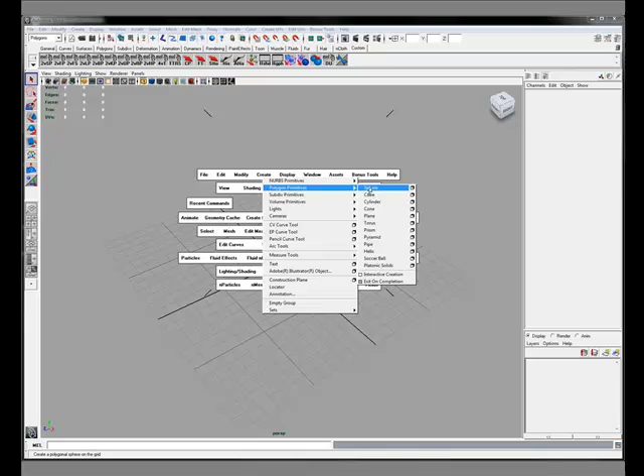Here's a method for creating a cylinder with holes in it. This time I'm going to start with a six-sided polygon.

This version is going to have a smooth surface, so I'm going to redraw some topology here. First, delete all the polygons except for the top. Snap it down to the grid using the X key and the middle mouse button. Rotate it 90 degrees to line up the vertices at the top and bottom.

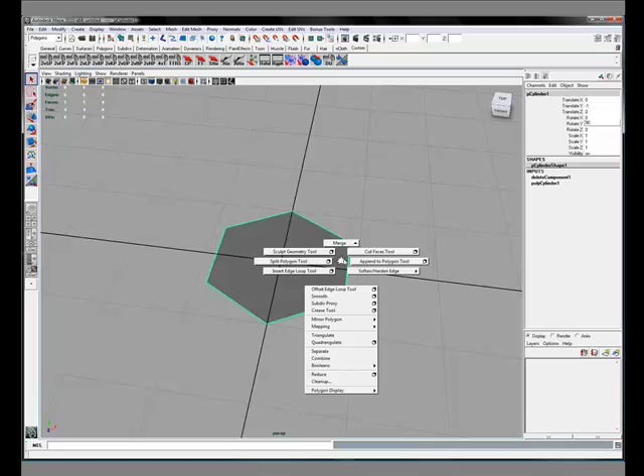Here I'm going to extrude what will become the hole itself. I use 0.67 as the extrude value so that it's 2/3 of the polygon. Now I'll snap the corners out to form a square.

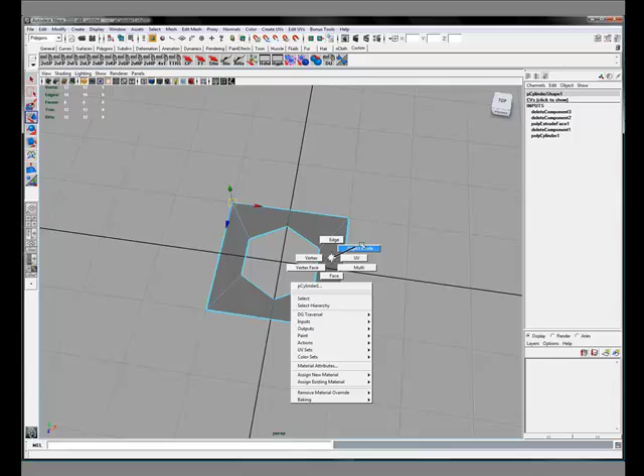Now I need to redraw some topology, so I'm going to make some copies. I'm going to do 2 rows of holes, and they're going to be offset. So I'll copy the original hole up and then move some of the polygons around to form the offset hole.

And then I'm going to make several copies here because I need to redraw the topology to eliminate those diagonal lines and make the lines flow around the cylinder and up and down the height. So I'll make a couple of temporary copies here.

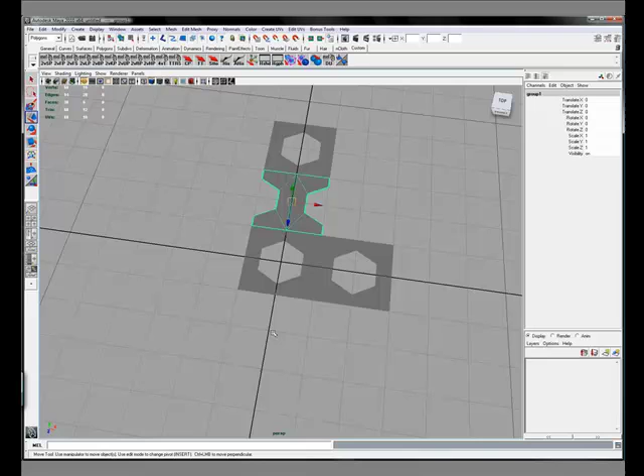We're going to have to merge them all together and then redraw the topology shortly.

Almost there. Now we merge them all together, combine them, merge the vertices. And now using the split polygon tool, we'll redraw the topology and then delete the diagonals at the end.

So just lots of little splits here. Okay, the full circle's just about done.

There we go. Now we'll deal with the 2 half circles, 2 in the middle. And now we delete the diagonals.

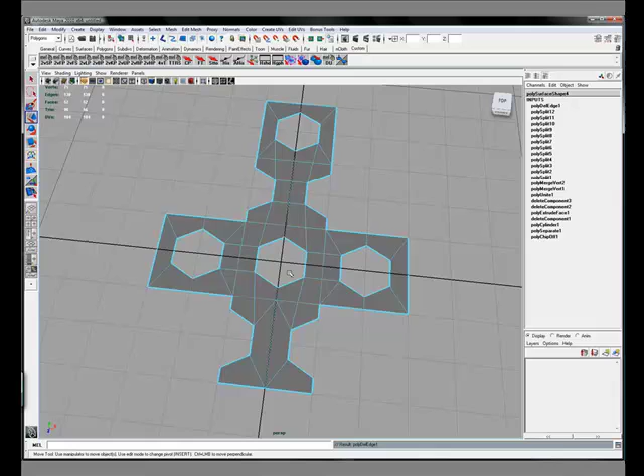We only have to worry about the full circle and the half circle, so we can delete all those other ones. They were just there to help us redraw the topology properly.

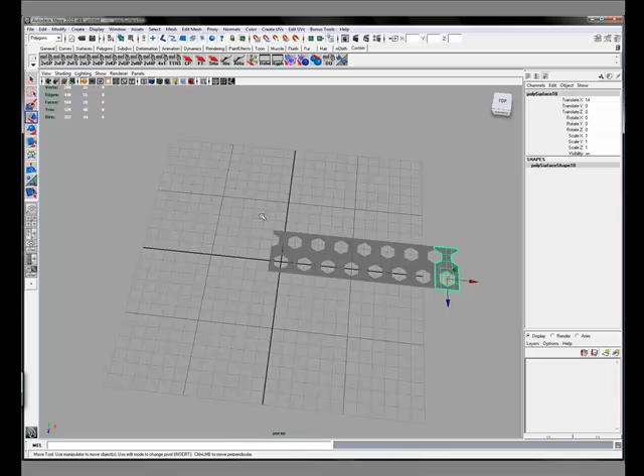Now we want 8 circles around the cylinder, so we'll make 8 copies of this using Shift D to duplicate and move. Now we combine this all together into a single part, merge all the vertices, center the pivot.

Recenter the object. Now we've got 2 strips of holes in a plane.

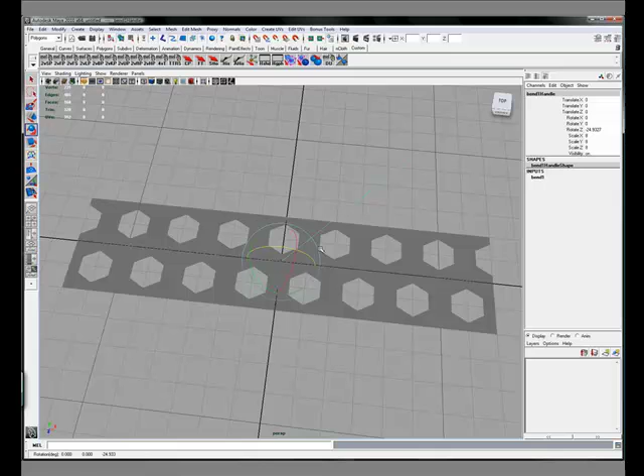If we just rotate the plane 2 pi radians, we get a cylinder. So we add a bend deformer and then add a curvature of 3.141592, and there we have a cylinder.

Now we just merge those vertices at the top, press the 3 key to smooth it, and boom. And now we have a topology that's flowing around and up and down the cylinder.

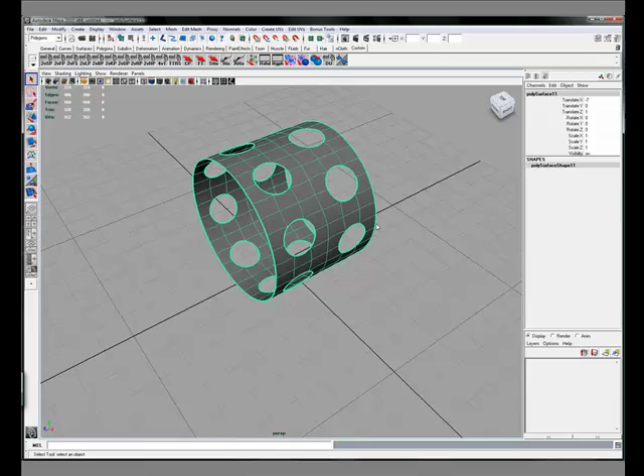To make it longer, we just duplicate that a couple times, again with Shift D to duplicate and move.

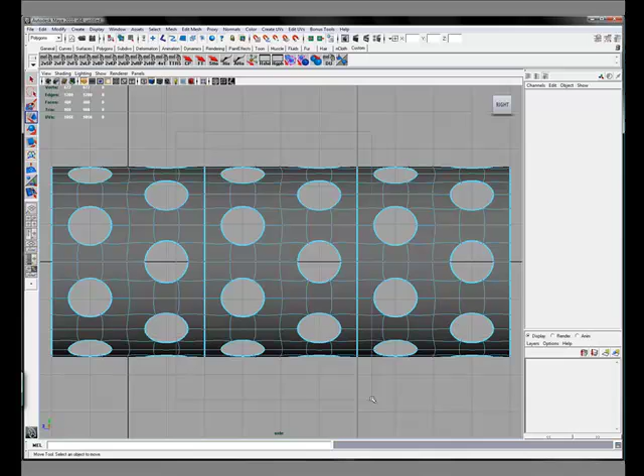Make 2 copies, combine everything together, merge all the vertices where they meet up, and now we have 1 surface.

Now we'll add a little thickness by extruding that object. So Edit Mesh, Extrude. I tumble around here a little bit, eventually I'll get to it.

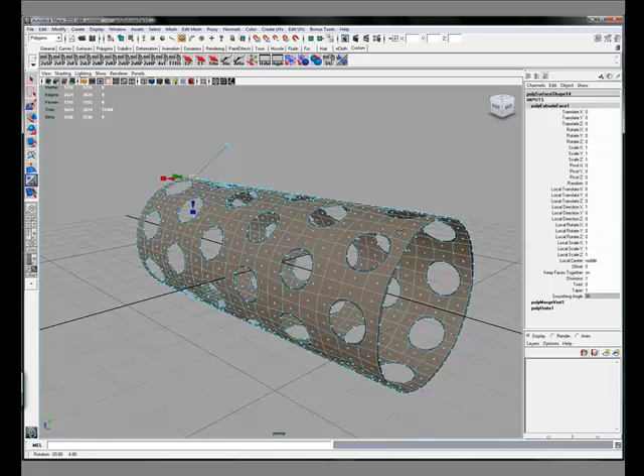There we go, Edit Mesh, Extrude. And then I do 3 extrudes in the Z: 0.02, 0.2, and 0.02 to tighten up the edges.

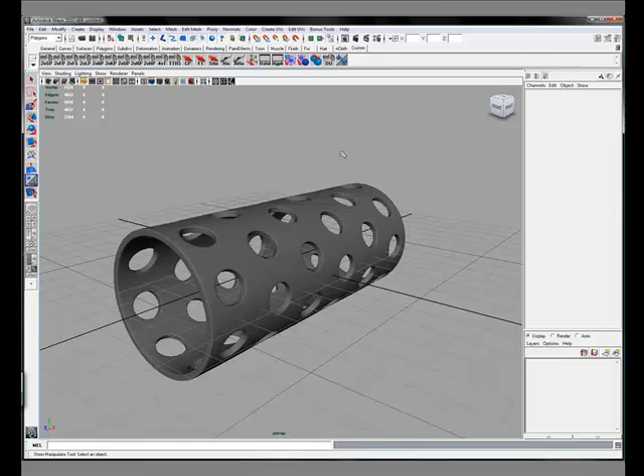And now in this video, I'm also going to show a way to set up a quick rendering rig. So we're going to apply a material to the object, a Phong, making it a sort of gunmetal blue color.

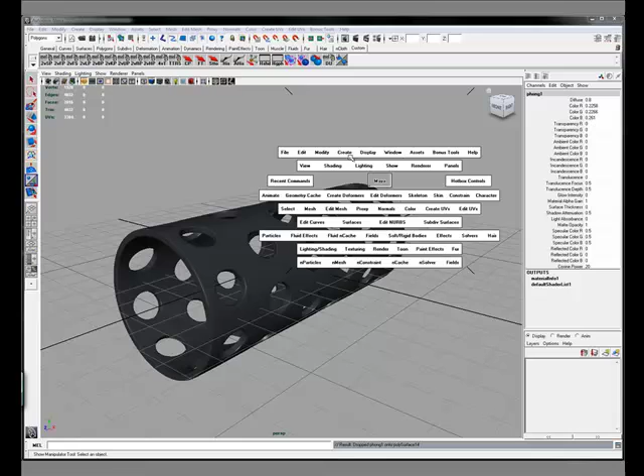And now we'll create a polygon plane with a single polygon to act as a stage. Just leave the default Lambert on it. Move it down.

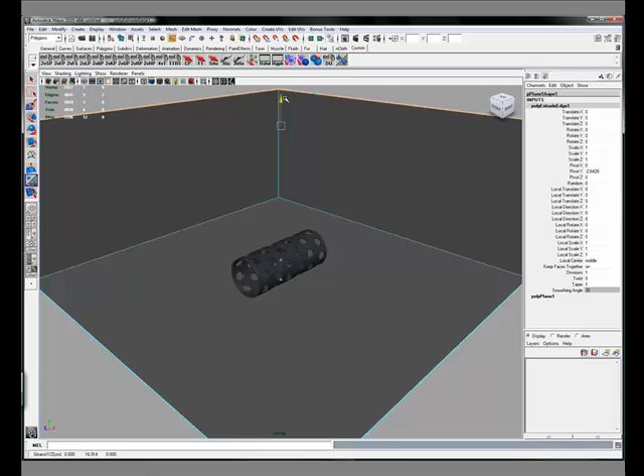Create a cyc wall by selecting the back two edges and extruding them up, and then beveling those. Add a couple of segments, tighten up the offset.

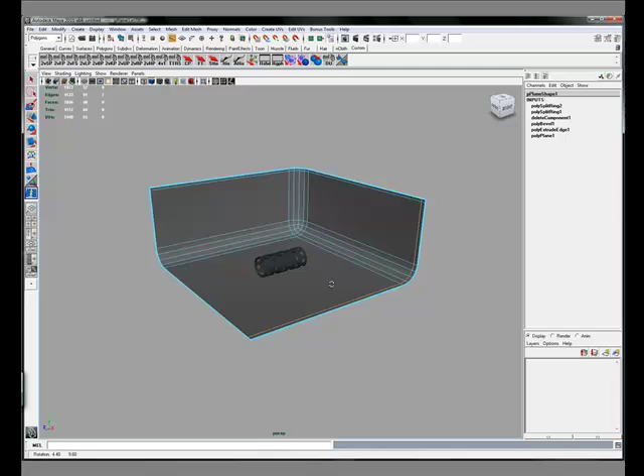Delete the extra polygons that get created from the bevel operation, smooth it, or add a couple lines to hold its shape, and then smooth it.

Now we'll set up the mental ray settings. Go to Quality, Fine Trace, turn on Final Gather, make it a TIFF, make it a 1K image.

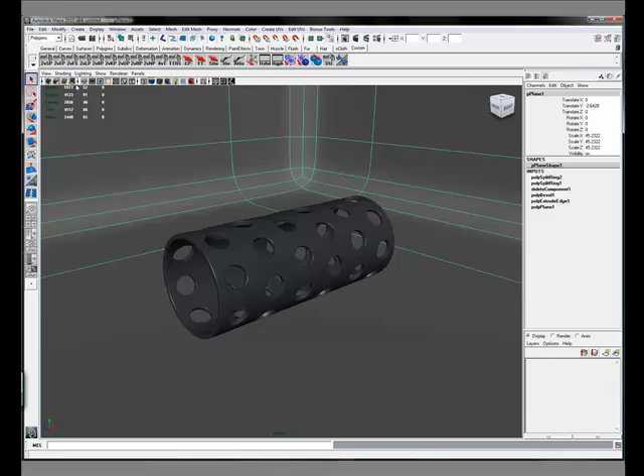Go to the camera environment settings, set the lighting to a light gray, frame up the object, and do a render.

And there you go, a nice render without any hassling with lights. Also in this video I'm going to show how to add contour lines or wireframe on the render.

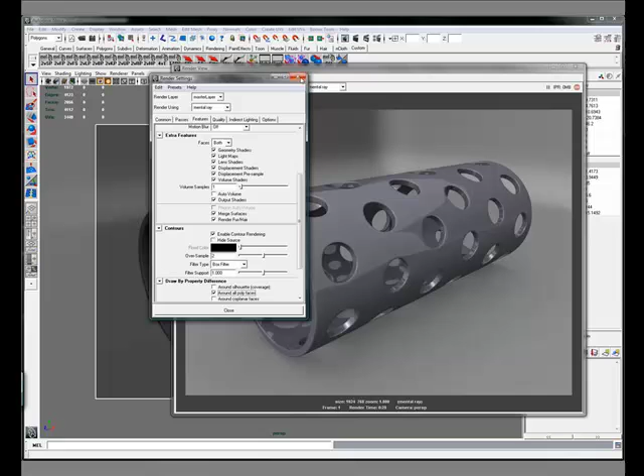Go to the features and select contours. Increase the oversample to 2. That'll just help to anti-alias the lines out.

Now if you were to render right now you'd get nothing. You have to also go to the material shader object and turn on contour render there. We're going to make it half a pixel width with a 50% alpha color of a lighter blue than we made the object itself.

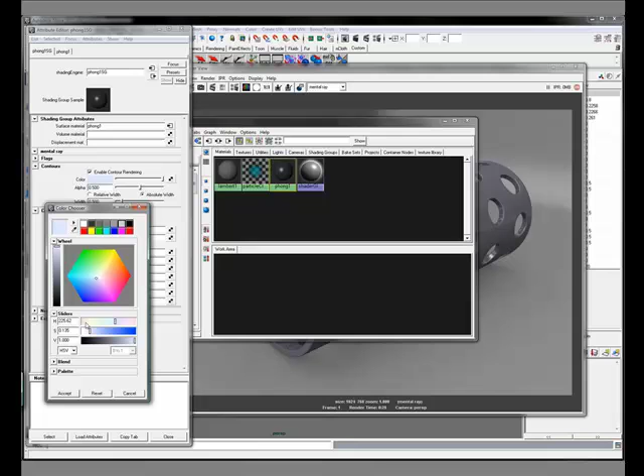And now with contour turned on in both places, also remember in the mental ray settings and global render settings you need to select the option to render around all polygon faces. And there you go. There's a nice wireframe on your render.